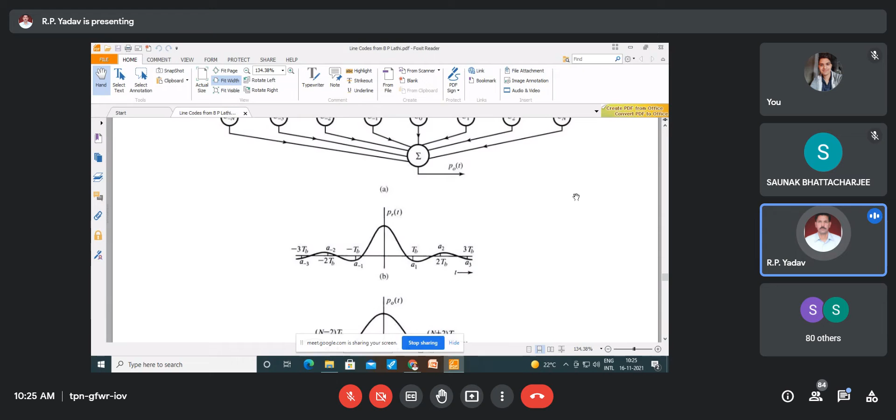Yeah, this is what we can call force equalizers or zero force equalizer. You might ask, how do we explain this? Let me explain why we need an equalizer.

Look here, suppose this is my incoming signal. Ideally, my sampling instant should have been where this pulse is crossing my zero axis or x-axis. Now look here, this is not happening because I am sampling it at this A1 instant. And if I am sampling at this TB A1, my amplitude becomes A1. It is not 0.

That means there is some interference, obviously, because if it's crossing at 0 - if you remember, we discussed last time that the sampling should always be done considering Nyquist pulses, which have a finite amplitude only at the origin, and zero at all other places. So if you sample a pulse when it is crossing this x-axis, I can reconstruct my signal better.

But now you can see here, because of this timing error or something, if I'm sampling at this instant where amplitude is A1, it is A2 let's say, minus TB, minus 2, A minus 2 or A minus 3. And this is just one pulse, because you are not transmitting one pulse, you are transmitting n number of pulses. So all these pulses, if you add up, that means A1 multiplied by n. So interference will obviously be very high.

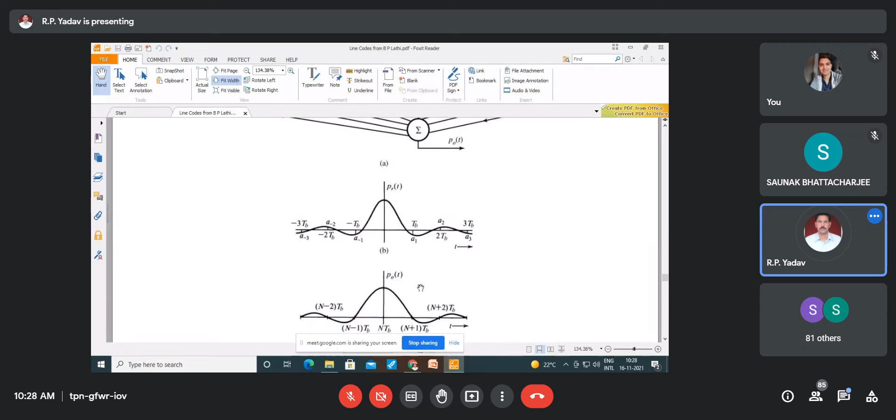Mathematically I couldn't draw these equations, but you can also define it mathematically, because if you are sampling a particular function or incoming signal at a particular instant... you can understand. Is it clear? Yes.

Yes sir, can represent this P0T as n pulses from minus n to plus n, Cn, that is a coefficient, Pr T minus NTB. I think you are reading all these notations.

If I calculate the sample of P0T at KTB, K may be any instant, then I define Cn, Pr, K minus n TB. So rather than T, I put K there. Then I can reconstruct this, defining P0K as some Cn, the coefficient that we are multiplying, Pr, K minus n. I prepare based upon this P0K value. We define P0K equal to 1 at K is equal to 0, and all other K it should be 0, as per the Nyquist criteria.

Then I can say that only a unique solution exists for this kind of situation. So I can prepare a matrix where I define all these Pr minus 1 values, and on the right hand side I say that suppose my pulse is finite at the kth instant, so I define 1 as some sort of matrix solution. It will have 2n plus 1 simultaneous equations in 2n plus 1 variables. This is a bit of an optimization problem, so I can define solutions there and calculate my coefficients c0, c1, c minus 1.

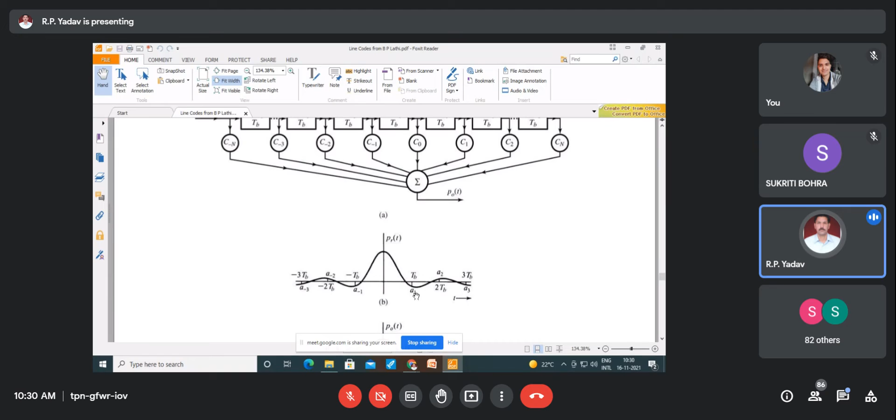If you remember this diagram, knowing all these coefficients I can make sure my delays are compensated. You can call it compensation also, because rather than getting sampled here, this pulse will be forced to pass through 0 here. We design all these coefficients in a manner that this pulse will be crossing zero here, rather than having a finite amplitude of A1. This is one technique called the force equalizer, or zero force equalizer, meaning you are forcing your pulse to have 0 amplitude at the sampling instant.

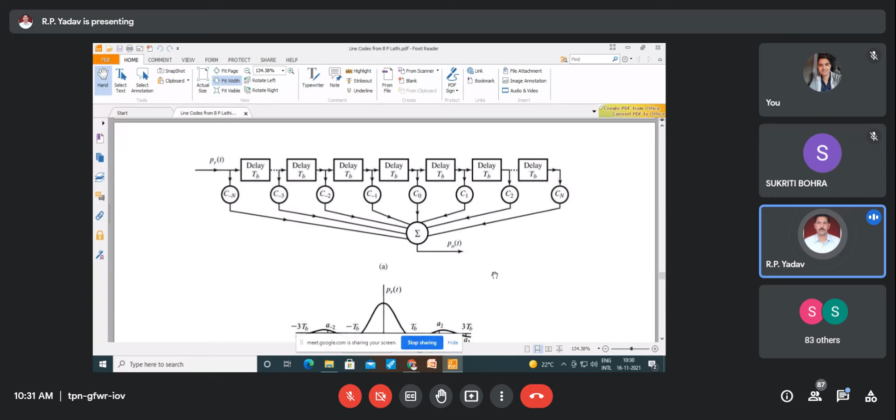This is one approach, not the only approach corresponding to force equalizers. Students, understand? Read it from the book, and we will discuss it again, maybe next time, or when we join the classes offline.

Now this is a particular diagram for timing extraction, as I was telling you. Inside you have the equalizer first, then the rectifier and clipper. You might ask why you are rectifying it. Recall again our line code power spectral density calculations — I told you that on-off signaling has impulses. So we try to get impulses somehow. We want a waveform giving impulsive information, because an impulse is easy to detect also.

So I do rectification, and after rectification I do the timing extraction, because when I attach those pulses to my tank circuit, the circuit will start oscillating at a particular frequency, which I can synchronize with. Then comes the amplifier, and then comes the phase shifter.

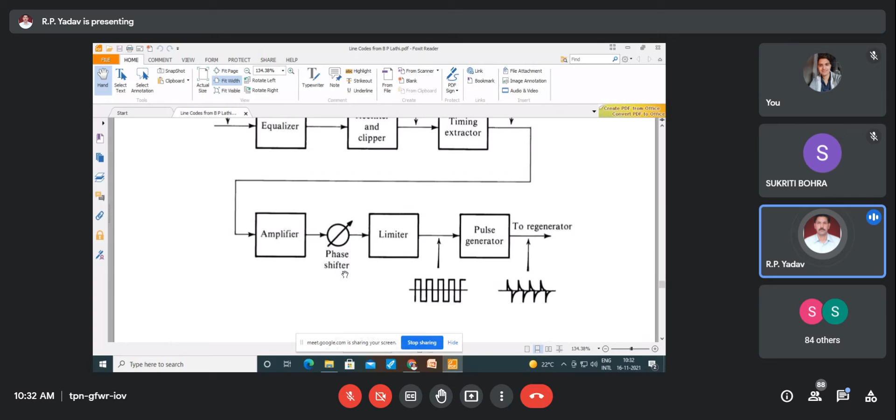What is the meaning of phase shifter? Many of you might know, or may not appreciate it right now, but phase shifter essentially means that if the signal is coming through an electrical line, it will have some resistance and capacitance component. So there will be time delays, and along with the time delays, some phase delays also. This phase information has to be compensated, so the phase shifter takes care of these delays.

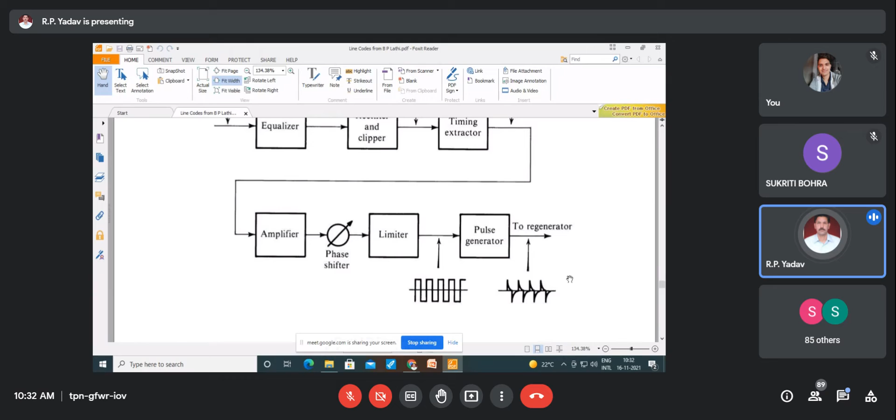Then comes the limiter. Limiter means we limit the amplitude up to, say, 5 volts or 10 volts, or whatever the logic family you are using makes use of. Then the pulse generator, and this may again be transmitted in one form or another, whatever form your transmission is taking place. So that is timing extraction.

I think everyone is trying to understand now. Let me see — yes, of course this particular pulse is there. But before that, if I'm transmitting this particular pulse, you might ask when this pulse can go wrong, and why it should go wrong at the receiver end. My question is, if you're transmitting, say, 5 volt or 8 volt, whatever voltage pulse, why should there be error at the receiver end? The receiver end error can only happen because of noise or some other interference. Agreed?

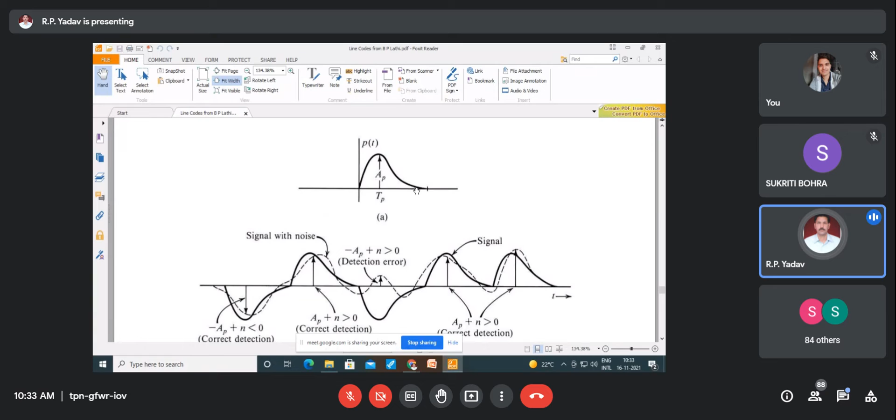Yes sir, there has to be some disturbance, you can say. Obviously, if my pulse is positive and you have a noise, that's what is explained here. If I have a bold, dark line, this corresponds to my signal, and this dotted line corresponds to my noise. Noise is random, it can take any position anywhere. So this is an example.

Now I'm using, let's say, polar signaling. Polar means 1 for positive, and -1 for 0.

So suppose the dotted line noise is something like this. What does it mean? That means minus AP plus noise is less than 0. Minus AP is my peak voltage here. So minus AP plus my noise signal, cumulatively they should generate some signal which is less than 0 for my receiver. That will happen because noise is also negative here, and this is also negative. So what happens when both add up? Only negative voltage I'll get. Negative voltage means that's a correct decision because only 0 has come.

Now look here, the same. If it's positive, this dark line corresponds to positive. My noise is again varying almost as positive, so there's no problem. Again here, AP plus N, where AP is my peak voltage for my signal and N is my noise. So AP plus N should be greater than 0. That means again it will be decided as 1 only because 1 has come.

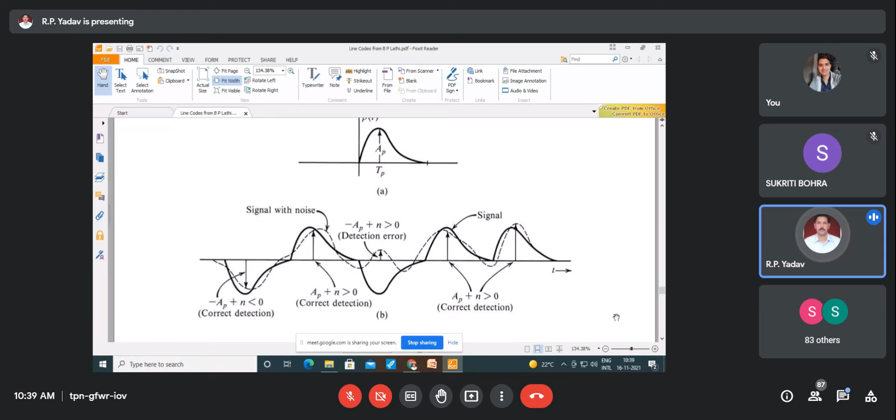If you look at the Gaussian distribution function, I must be having a slide, but right now it's not there. Gaussian essentially means this broader line, and in any statistical course you must have studied about at least some distribution functions. So suppose this noise behaves as Gaussian.

Now suppose I have a positive pulse. What kind of Gaussian, this white Gaussian noise, can affect this particular positive pulse, or suppose this negative pulse is affected. But a negative pulse can only be made wrong by a noise which is positive. If the noise is negative for this particular pulse, there is no issue.

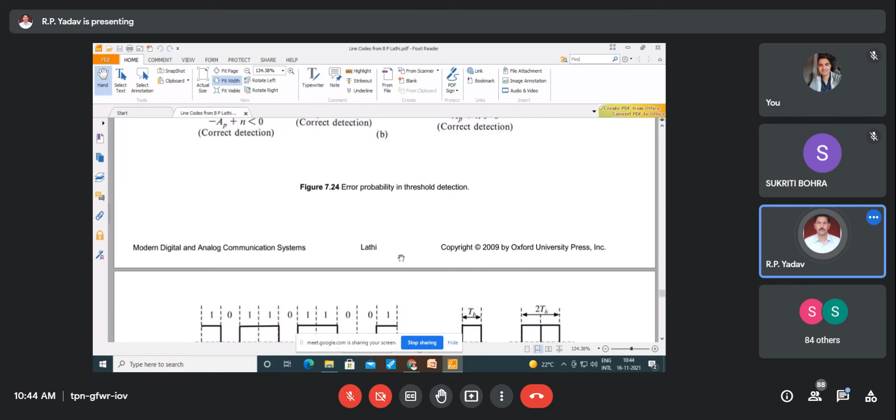Error function is a definite integral, and it is very well used in signal communication. Perhaps in class I'll explain more about this particular probability of error also. It's not difficult to understand.

Now the next topic is eye patterns. Eye patterns essentially provide you a particular facility to see where your signal is getting bad, or where your signal is not up to proper marking.

If you test your particular channel output anywhere, and you put it to some CRO with some sampling, you can see your sampled signal, or the signal condition at a particular instant. So the eye pattern gives me the condition of the signal, because the signal obviously keeps on getting attenuation or something.

So the time base of the oscilloscope is triggered at the same rate as the incoming pulses. The time base is synchronized, and then we sample these particular pulses. The first diagram A has ideal pulses. I'm transmitting 1 0 1 1, something like that.

If it is an ideal pulse, and if I calculate the eye pattern here, this is almost ideal, because there is no attenuation, nothing corresponding to it. Similarly for the next pulse also.

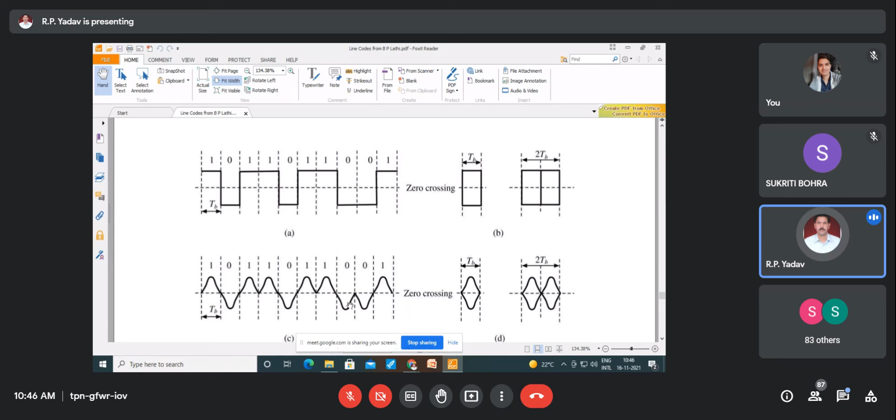If you look at this kind of pulses, the eye pattern will be something like this. If it's totally square, the eye pattern should look like that, because I am sampling at the same instant, and my timing base circuit is synchronized with the incoming timing information. So both of these are ideal, you can call it.

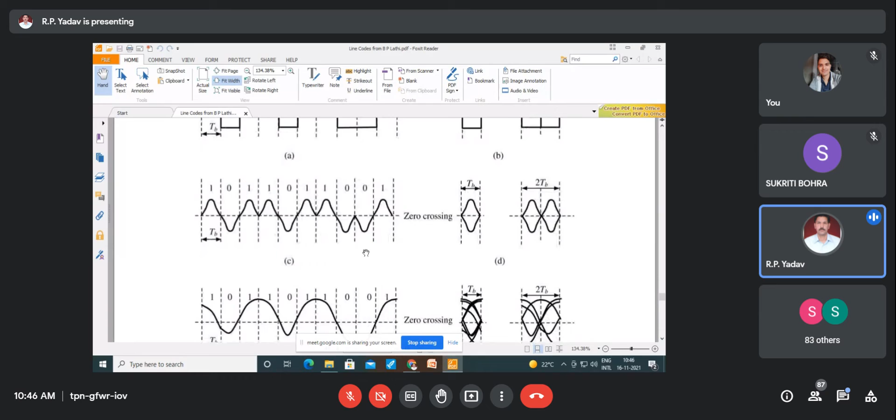Now look at the real signal. The real signal sample, if you look at this particular diagram E, this is crisscrossing. Some signal is very heavily attenuated, some is on the positive side, some on the negative side, and obviously this is not a very healthy picture. This kind of thing happens because it's synchronized with that same time signal.

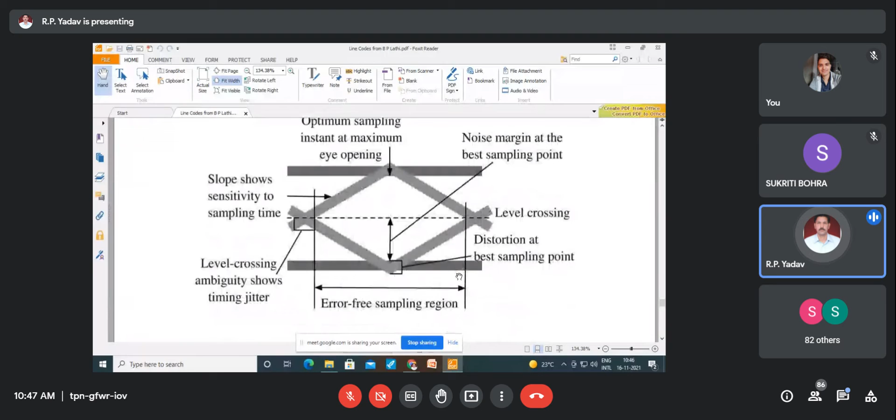Now you might say, what does the eye pattern mean? Look here, this is more clear perhaps, at least in this diagram. Now if you look at this eye pattern, what does it represent? The slope of the pulse here shows sensitivity to the sampling time.

So the slope will give me information about sensitivity of the sampling time. Optimum sampling means I'll sample my signal here at this particular center. If you don't sample it properly, there may be some problem, because suppose you have got 5 volts here, my peak should be here somehow. I'm presuming that the peak of the signal is coming at this instant, and that is the maximum eye opening. So I sample it there.

Now this represents my noise margin, the noise margin at the best sampling point. What does it mean by noise margin? Noise margin means how much noise can be accommodated or tolerated. This is my level crossing.

This particular level represents level crossing, and this represents the distortion at the best sampling point, how much distortion is there. And level crossing ambiguity shows timing jitter.

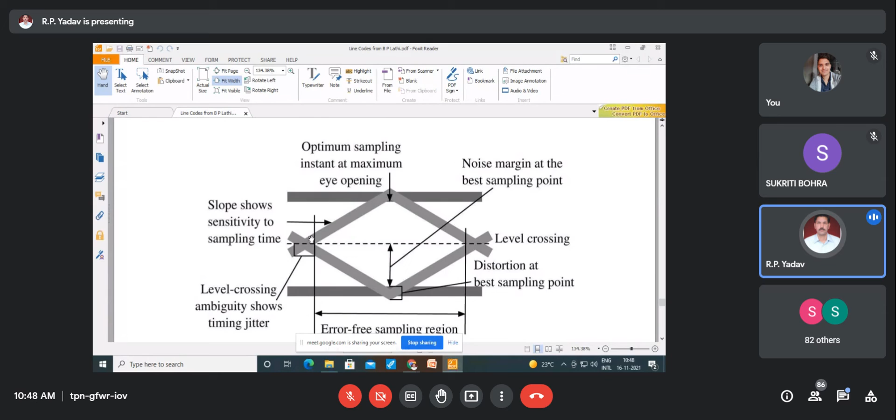Look here, this kind of crisscross represents my timing jitter, meaning lack of synchronization, or maybe overstepping or understepping. There may be some delays, or some slow down, overstepping or lagging behind. So this kind of configuration gives me some idea about timing jitter, and that's the error-free sampling region. I hope each one of you understands that. The receiver has to make a decision at what instant.

You might say that we can sample it here also. But the best sampling result will obviously be when it is at a peak value.

So this is an eye diagram of a transmitted signal. And why is this eye diagram important? Because it gives me information about the signal quality.

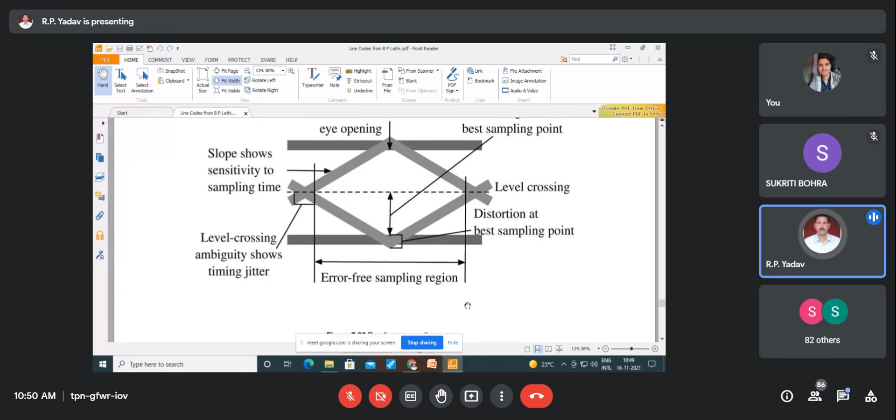As I said earlier, we should have a repeater at 20 kilometers, a repeater at 40 kilometers. We can make out whether it is okay or not. If you put on your scope, the person maintaining the transmission line can easily go and put on these connections, and then he can see on the CRO what kind of eye pattern is getting generated at this particular instant across a particular pair. So he can make a decision about, in your link budget analysis, at what point the signal has to be replenished or re-energized. So those calculations are based upon that kind of measurement.

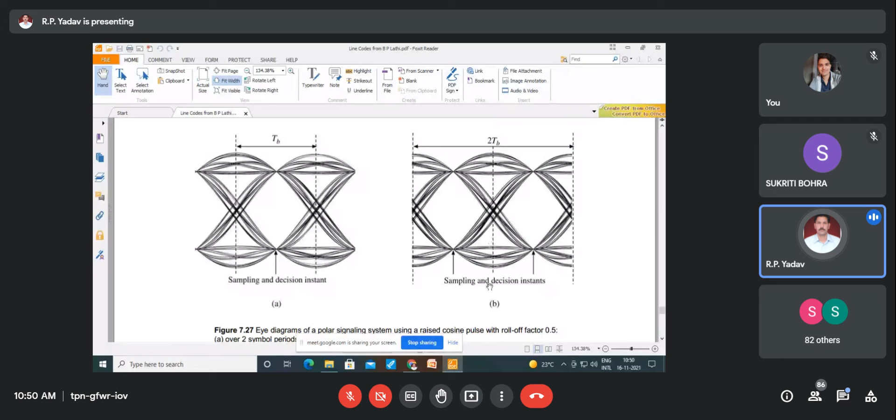I think this sampling and decision instant is the same thing you can say as eye patterns, or polar signal systems using a raised cosine pulse. This kind of pulse is coming for a raised cosine pulse with roll-off factor of 0.5, over 2 symbol periods, 2 TB, with time shift and without time shift. Both of them are there.

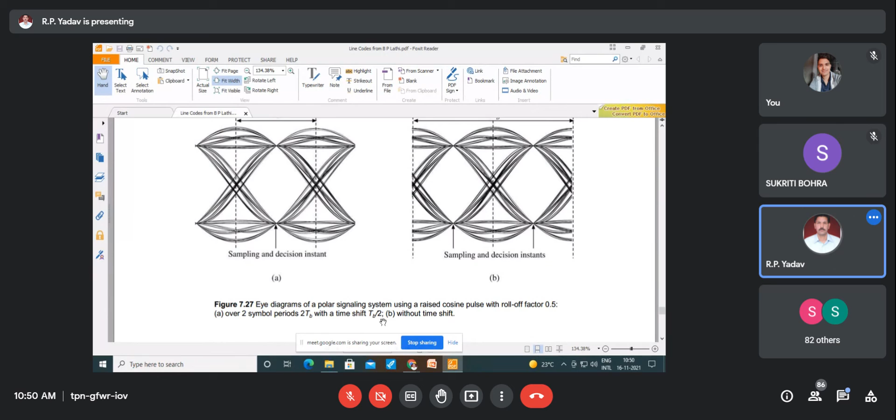Now this is my 4-ary PAM signal, which we will start now. I think in our next lecture we may start with these error calculations, or basic digital modulation schemes also. What is a PAM signal?

Pulse amplitude modulated signal, yes. You have already done this during your PCM course. What is a PAM signal?

Yes student, someone should reply. Sir, the amplitude of the pulse signal is varied according to the incoming message signal. Yeah, and in fact it's essentially a sampled signal, sir, because the sampled amplitude at a particular instant is as per your incoming signal.

Okay, is this an analog signal or a digital signal, this PAM signal? Is this analog or digital? Pulse amplitude modulated signal, sampled signal. Digital?

No, it's not digital, because digital will have only two levels, right, 0 and 1. But your PAM signal will have all, every instant you will generate some voltage. So it cannot be digital. It's essentially a continuous signal.

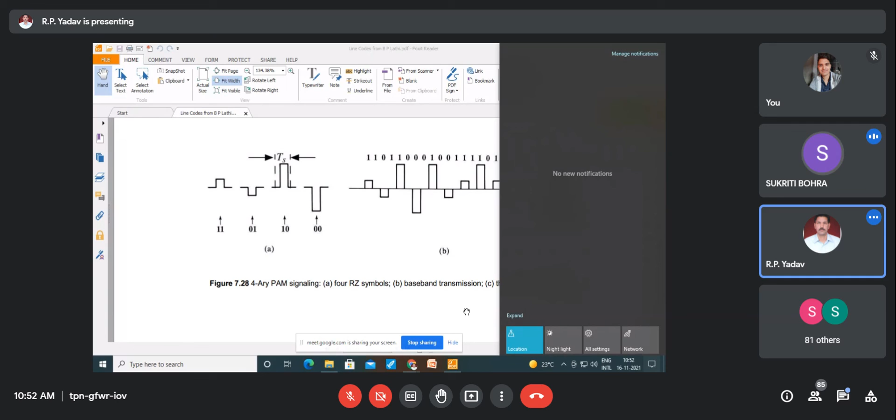All students, yes sir, understood the difference between analog, discrete, and digital. So a discrete signal can take many amplitude values, like your sampled signal can take many values depending upon your message signal, but your digital signal will take only binary values, it has to be 0 or 1.

So that's what you do in PCM. In PCM, what you do is you sample it, then what you get is pulse amplitude modulated signal, and then you quantize it. Once you quantize it, you encode it, and after encoding you get your last signal. In encoding, what you do is you assign certain bits depending upon the amplitude, 3 or 5. I think the PCM code that you must have generated, like how the 8 bits are generated.

I think, as I said in the beginning, you should revisit those lectures. At least, I mean, you might say that if I ask you, what is the data rate in, let's say, PCM.

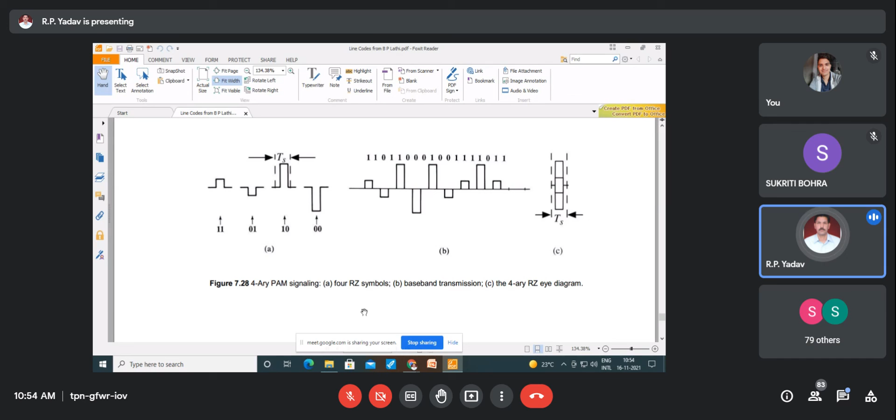Your voice signal, if you look at it, is sampled at 8 kilohertz, and each sample is assigned 8 bits, so this becomes 64 kilobits. It's a constant speed because it's circuit switched. Normally in packet switching you can vary the speed, but in circuit switching, the speed remains constant. Anyway, you'll read more about these things and we'll discuss them in class as well.

I think this is what is simply called an ASK signal. The most elementary form of digital modulation is amplitude shift keying, ASK. Of course, in the lab, you probably haven't done this experiment.

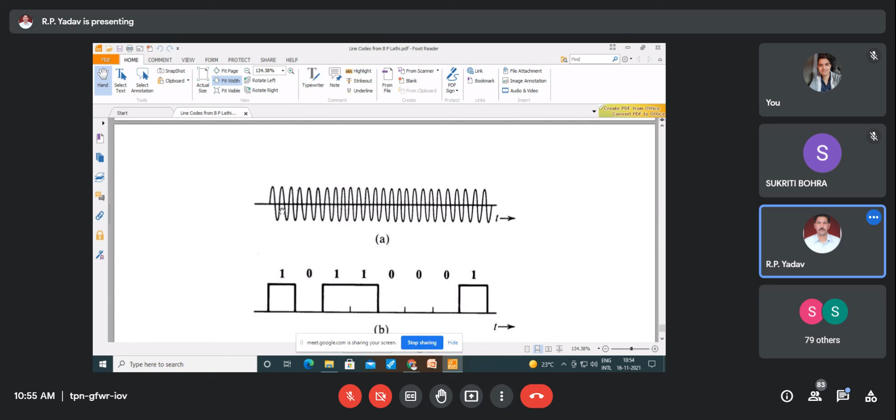ASK essentially means, if you look at this figure in part A, you have your carrier signal. So in ASK, suppose this is my baseband signal, on-off signaling, with bits 1 0 1 1 0 0 0 1. If I transmit a 1, I transmit this particular carrier pulse, and for a 0, I don't transmit any signal. Again if it's a 1, I transmit the corresponding amplitude of this carrier, and if there are zeros, I don't transmit.

Look at this, the most elementary form, because you might think digital modulation came about in just one day or one year. Actually, a lot of scientists and engineers were struggling with it, figuring out how we make this binary form transmittable over a channel, so this carrier can be supported on the channel easily.

Understand? That's what I explained in the very first meeting, why we have digital modulation. Because the channel can only support low frequency signals, it cannot support high frequency signals because of limited bandwidth, like twisted pair or coaxial cables which have their inherent limitations.

In fact, you should know a little bit about ADSL, asymmetric digital subscriber lines, whether symmetric or asymmetric digital subscriber lines. I think those were the kind of technology which enabled high-speed transmission across these cables as well.

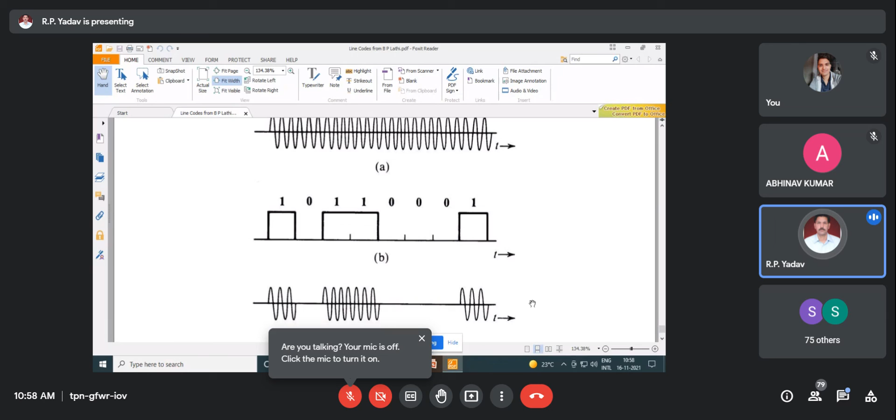So suppose this carrier has come. If you have a squaring loop, maybe some frequency signal, you will pick up that this corresponds to the signal, so that any other frequency component you get means that's fictitious or wrong. Understand? The squaring loop detectors are normally used mostly like in BPSK also, where we have carrier recovery, if you've studied in the lab. But mostly these are done for the synchronous demodulation exercise.

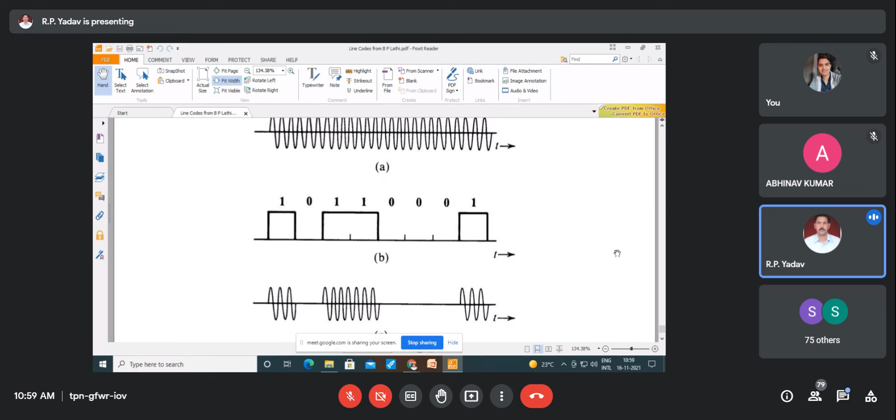Okay, because with phase or other things, so many things, I think in detection we will see that. The digital detection itself is a big area. In fact, we will talk more about it in the next lectures. So no question? Okay, so we meet next lecture, fine.